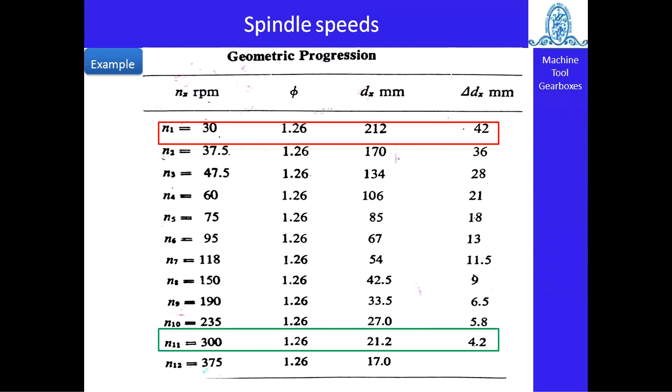So how will you get the compact or better gearbox design? When you keep the phi constant. When the ratio of two successive spindle speed steps is constant, then only we can say that the phi is constant. Means what? Whatever speed we increase or decrease, its range is fixed, isn't it? Either it has to double or halve, but its range is fixed. If you see in previous cases, speed is changing drastically. But in case of geometric progression, because phi is constant, the speed is not drastically changed as compared to arithmetic, isn't it? And the last one is harmonic.

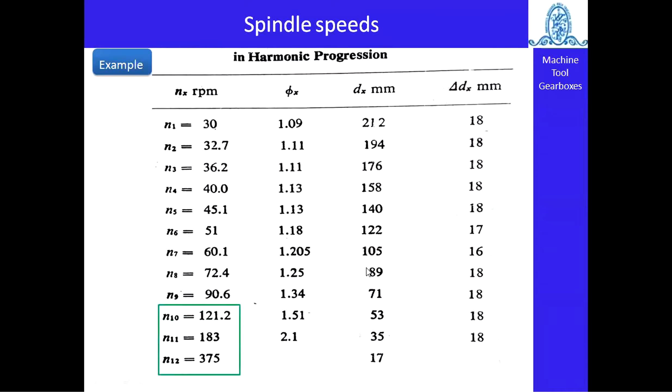So the same diameter difference we got at the lower spindle speed side, and we need to add more spindle speed steps at the higher side. Okay, these are the conclusions. Next point is, so that's why we have selected geometric progression. Then we need to see why we are selecting geometric progression, isn't it?

So there are various factors, and after studying those factors, you come to know that geometric progression is the only step regulation law to design any kind of machine tool gearbox. So one of the factors is that in geometric progression, we get constant loss of economic cutting speed. Constant loss of economic cutting speed we get in case of geometric progression only. Why can we say this statement, constant loss of economic cutting speed?

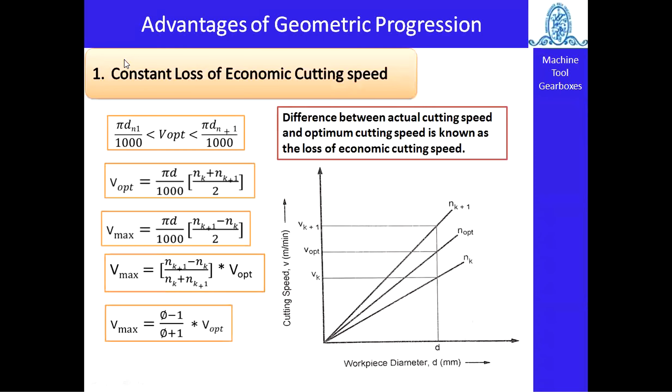Okay, so one more advantage, keep in mind, constant loss of economic cutting speed we get in the geometric progression, because the maximum cutting speed is totally dependent on phi. And in which step regulation law is phi constant? Answer is geometric progression. So that's why we have to choose geometric progression. So this is the first criteria. Next, another advantage is better design feature.

Because phi is constant, it means the ratio of two successive spindle speeds is constant. If the speed ratio stays constant, the number of teeth available on the gears is also accurate. Means we can predict the speed, because we know phi is constant. So we need control over the number of teeth on the gears, and on the basis of that number of teeth we can control the axial dimension as well as the radial dimension of the gearbox. That's why we get a better design feature with geometric progression. So gear shifting is less time consuming, convenient and economical.

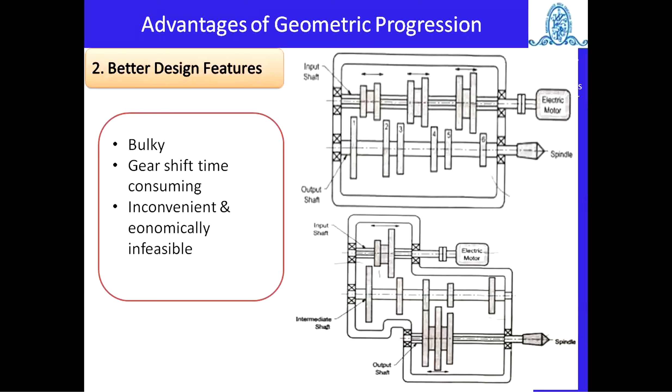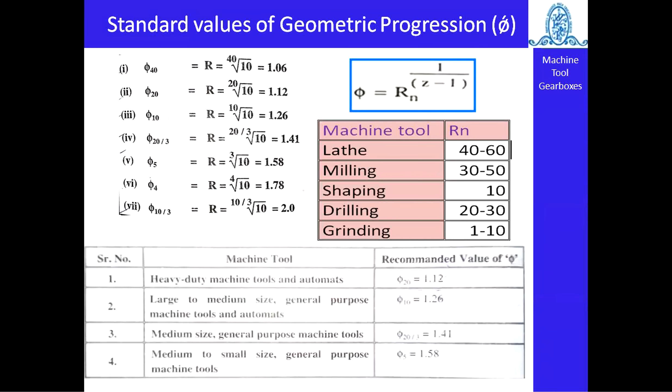So take the snapshot or write down in your notebook the standard values of geometric progression, that is phi is equal to Rn raised to 1 upon z minus 1, and standard values of Rn for various machine tools like lathe machine, milling machine, shaping machine, drilling machine and grinding machine. And the recommended value of phi is also given for heavy duty, large duty, medium size and medium to small size.